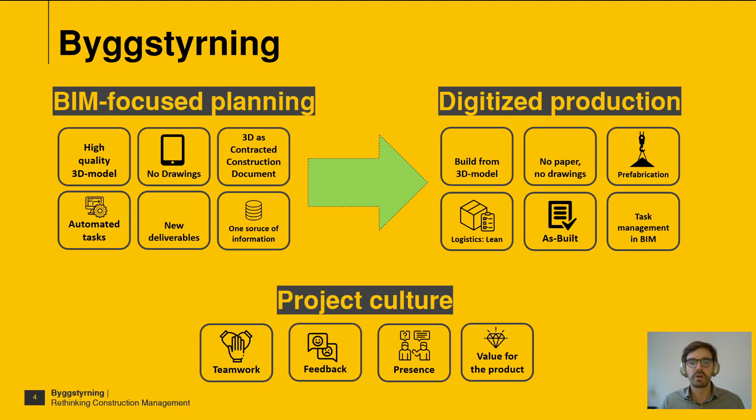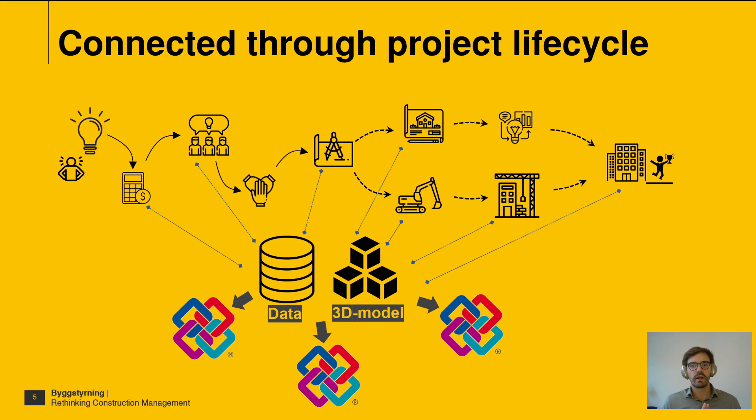We really connect every single phase of a construction life cycle to a common environment, one single source of truth, and do a lot of 3D modeling from the early phases that we enhance over time, to be able to collaborate with all the stakeholders involved using different software. We always use open BIM standards to really be able to collaborate with people in the industry.

About Project Celsius: this project started 3 years ago with the design phase, and it is now finished, actually finished this week, November 1st, on Monday. It is a laboratory and office building in Uppsala, Sweden, in a highly intense innovation cluster area of Sweden, where there's a lot of research on medical laboratories. It's a 12,000 square meter building, together with the biggest building owner in Sweden, Vasakronan.

It's on 6 floors, with a high focus on sustainability buildings right now, which is really good. This building is certified LEED Platinum, the highest standard for that certification system. So it's a really sustainable building with very innovative energy systems and water systems to take care of all the waste within the building itself. It's a really fascinating building from a technical perspective, but from a digitalization and construction phase, it's even more impressive.

We have used 3D models as our contractual construction documents. We used the IFC files as the legal contractual document, and we have not produced any 2D drawings as construction documents. We have to do that sometimes for wiring and some details, and we have produced 2D PDFs, but we have never produced any paper.

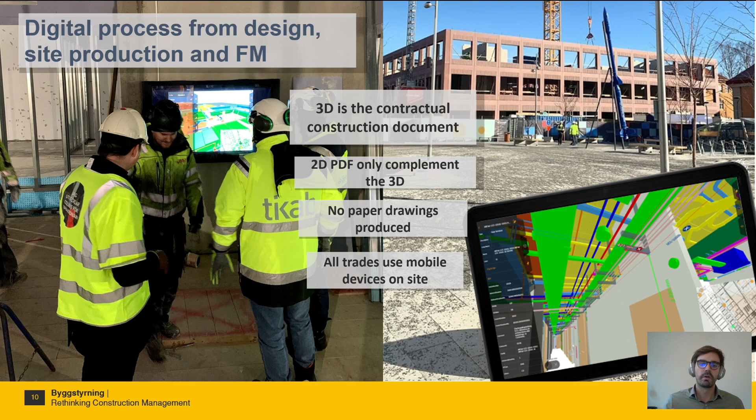Three years ago, when we started the project and started to design it, we had to focus on a completely new way of delivering projects. We were tired of the old way of working, as you see to the left, where everybody works in silos. We wanted to work in a new way.

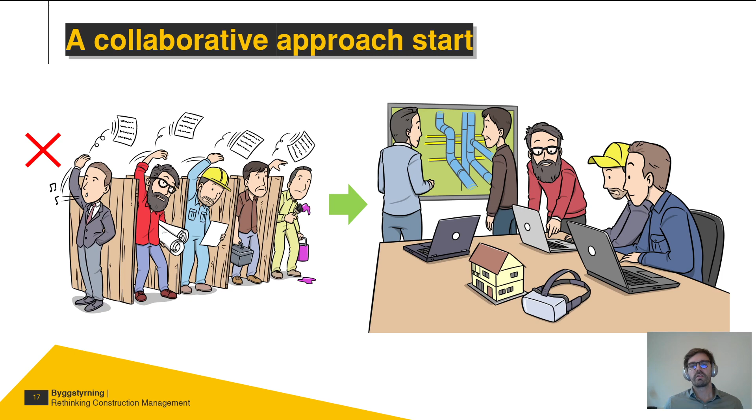Instead we took this approach with the ICE standard, integrated concurrent engineering, and we really sat down with all the stakeholders and involvement to start designing. We also had this kind of collaborative approach later on into the production phase as well.

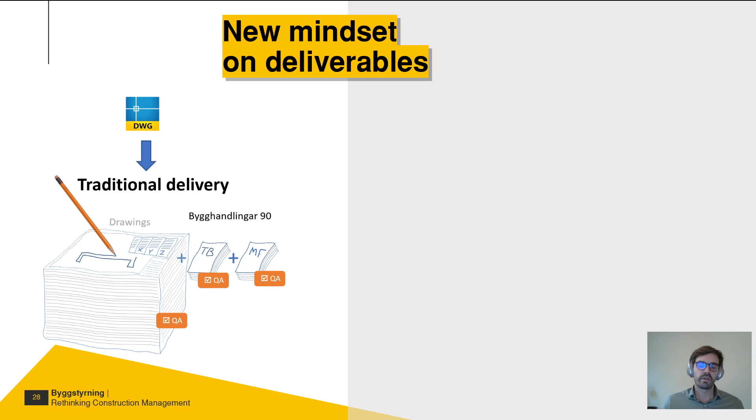But what we were also questioning from the early start of the project was: why do we have to deliver all these classical drawings? Why can't we deliver in a new way? So we started to rethink how we can deliver information.

Instead, we came up with the idea that we can actually deliver information through other file formats, and present the information to other people in the project in the best possible way for them to have the information. If it's somebody that's going to do an estimate on the project, they would very much like to have quantities from the model rather than a drawing.

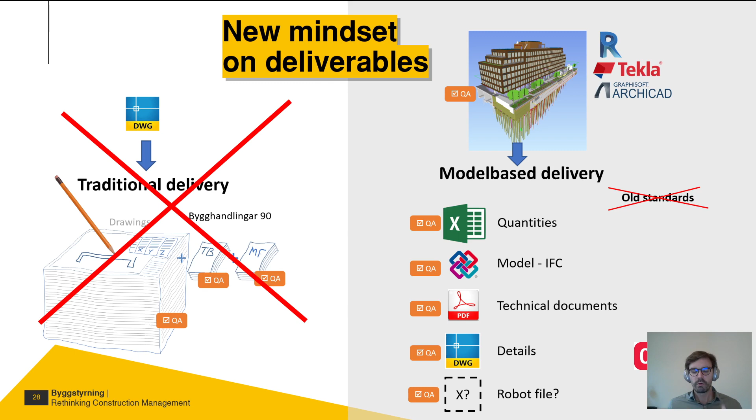So we produce quantities in data tables, and we deliver the IFC model and whatever information was needed from our source files, we could take out. We had a high focus on producing really high-quality source files, where the information is born. If we have really good information there, you can extract that information in a more quality-assured way. So I'm going to skip the design phase because I want to talk about the construction phase.

Before we move into construction phase, I have to mention how we did the procurement in this project, because we used the 3D model as the base for our procurement process as well. So when we wanted contractors to help us build this building, we sent out our 3D model for them to have a look at, to give their estimation and bid back to us.

So we sent out IFC models with just the information that they were going to build, and we also provided them with quantities from the model, because not everyone can take out quantities by themselves from the models. So we did that for them, and we also gave them the classical technical documents in PDF and some details and sections in PDF as well, so you can understand what you're going to build.

And to put everything in context, we also provided them with all the IFC models in the project, in different viewers, so everybody could use whatever software they wanted. And that's really key here, is to enable everybody in the industry to be part of the project by using open IFC files and open BIM models.

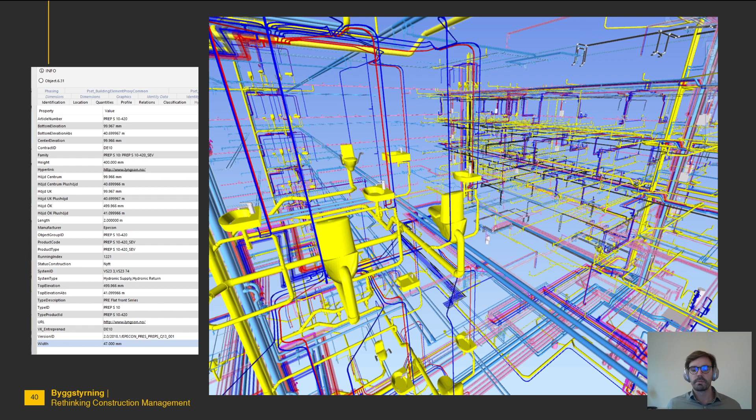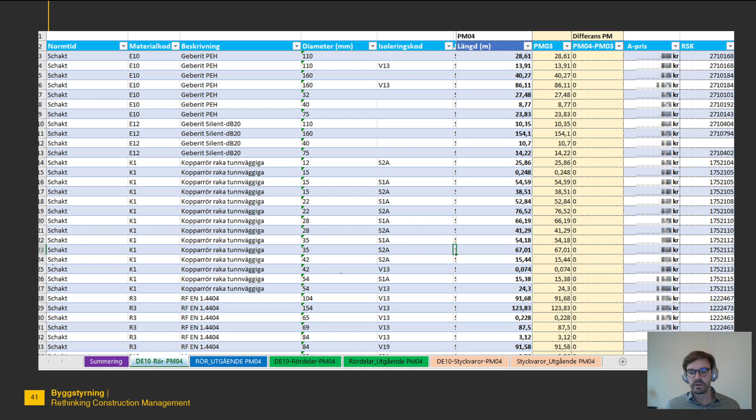You can also view the IFC file through a table, like an Excel table, so you can extract all the information in the IFC file and just put it in a data table like this with the quantities. So we did all the quantities for the bidders as well.

So we have divided the building among many different contractors that are going to help us build that specific building element. For example, the window, we had a bidding for that and a contractor for that, and the ceiling, we had a bidding for that and a contractor for that.

So we split it up into different IFC files that you could combine into one big IFC file, but it was a different IFC file for each contractor, so it was really clear what was in their contract to build. So if we had the contractor for the window, it only contained the windows that they were going to install and nothing else. So it was really clear on the scope of their contract, and exactly what kind of products they were going to install. So it was super clear and super easy for them to take part of the information.

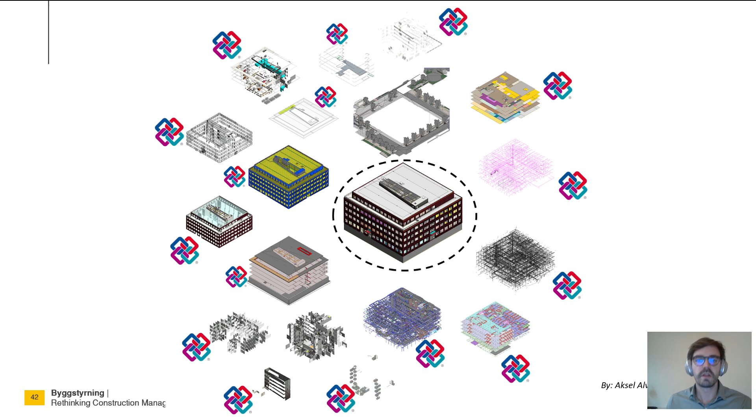And we could immediately see what we were going to buy. So when we have done all the bidding and we have a bunch of contractors that are going to help us build this, we also want them to construct and build from the 3D model.

So this is our a bit messy workflow on how we have achieved that. During the design phase, we have used a bunch of software, but mainly Revit, which we have used BIM 360 to link together in the cloud. But we have also used Tekla for superstructure and some ArchiCAD for interior design.

And to work in the design, we have been able to collaborate by exporting IFC files to each other. And to eliminate human errors in this process, we have set up nightly routines on servers that automatically export IFC files during the night. So we always have up-to-date IFC files from our BIM authoring tools. It's a completely automated process.

And then we use SimpleBIM to clean the IFC file and color them in a proper way and do some data management in SimpleBIM. And then we can take them to Solibri for doing quantity takeoffs.

But we also save them up to this field application that we are using, which is StreamBIM. So we put all the IFC files there, and you can view the 3D in the field, and you can put other documentation here. We put our PDF for our weekly collaborating meetings in a whiteboard app. We put a link to photos from each room.

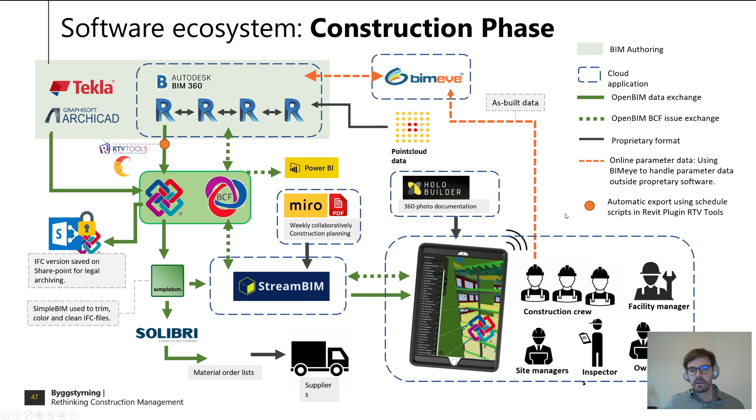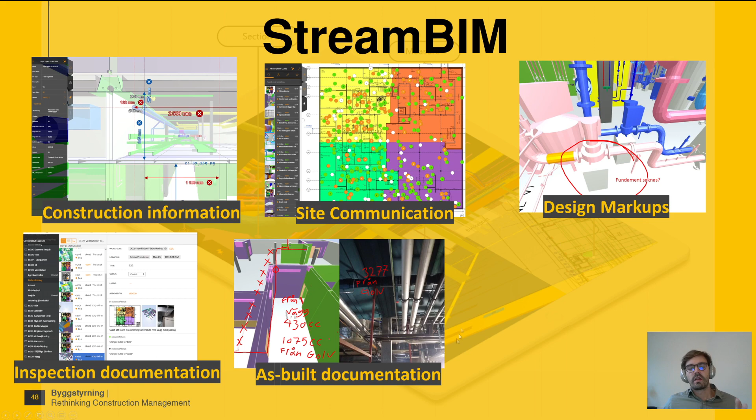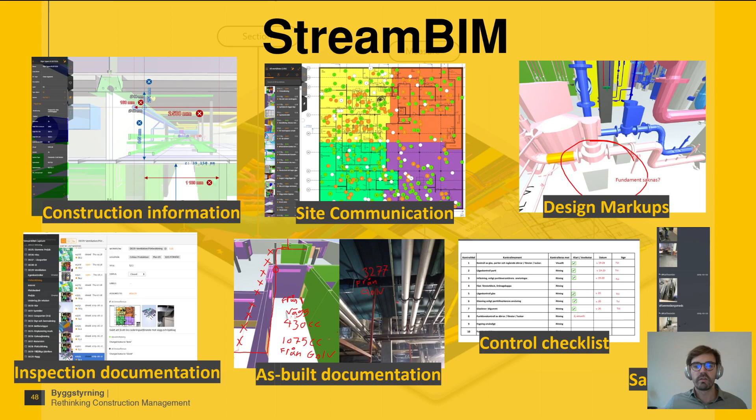And so we use StreamBIM for everything we do in the field, from construction information to communication to inspection, and using it for as-built documentation, so we can update our models. We do control checklists in all kinds of ways, so everybody can follow up. And we also do safety issues. You don't see it because I'm behind that blob here, but we do all the safety issues around, so the site is clean and nice and safe for everybody to work in. We do all that kind of management within this application.

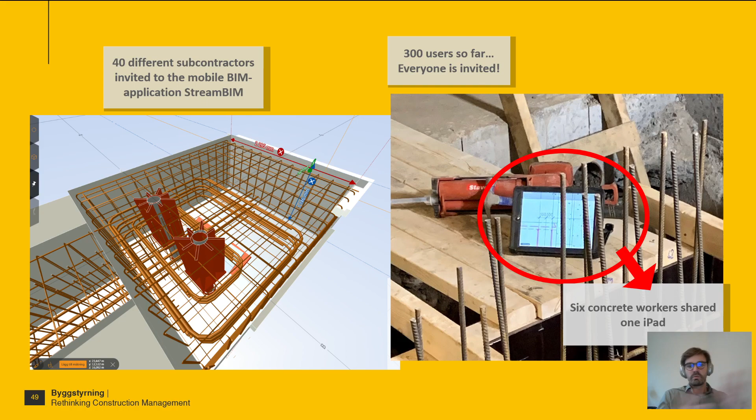So everybody on site is invited and using StreamBIM for taking part in the project. So they have to have a login to this platform. So we have had over 300 users so far during the project lifecycle. But not everybody's running around with an iPad or a mobile phone. For example, the concrete team, six people shared one iPad, so it's not that tech-savvy a site. You could still use your own phone as well.

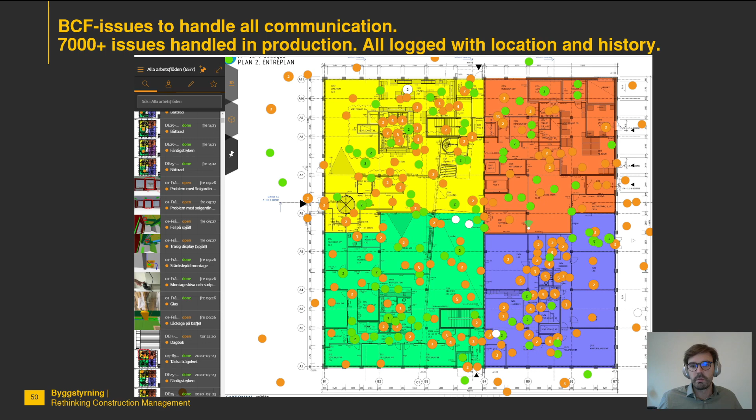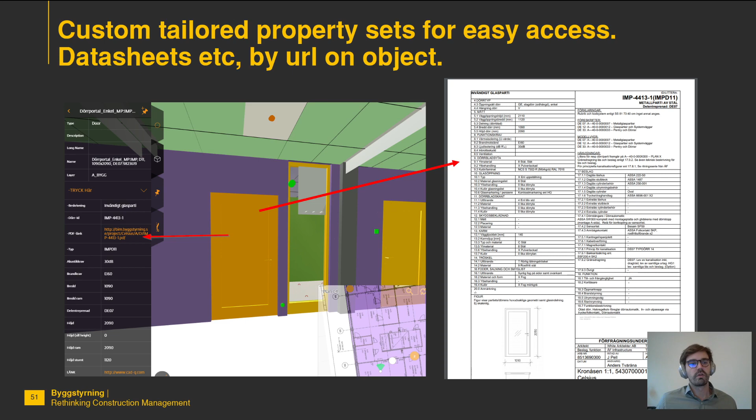So this is just an example of all the issues we are handling on site. I think we are almost up to 8,000 issues we've been handling during the construction phase. We also link a lot of information to the objects itself by using property sets within the IFC file, and put on smart properties and really display the properties in a good way so everybody can understand, because not all properties in the objects are relevant during the production, so we have to highlight them with the different property sets and link information.

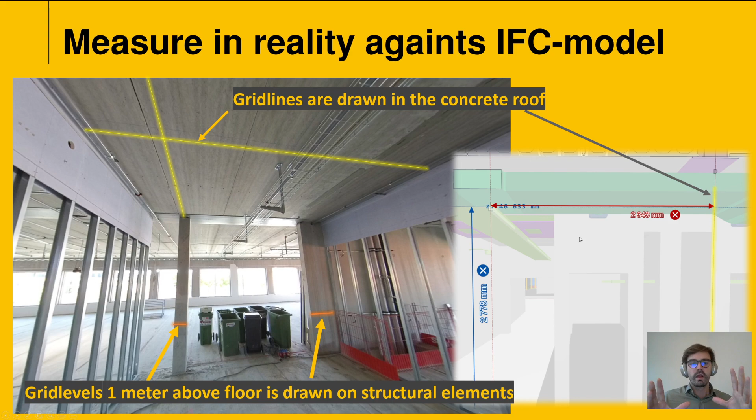And to be able to take measurements from the reality and within the IFC file, you have to have some kind of reference for both of them. So we use grid lines that we have drawn physically in the roof and also on columns and walls. So we have grid lines there, and you can have laser measurement tools to take measurements from these lines in reality, and we have the same lines within the IFC models, so you can take measurements from the lines in the IFC model to the lines in reality, and in that way make sure that you put your things in the correct place.

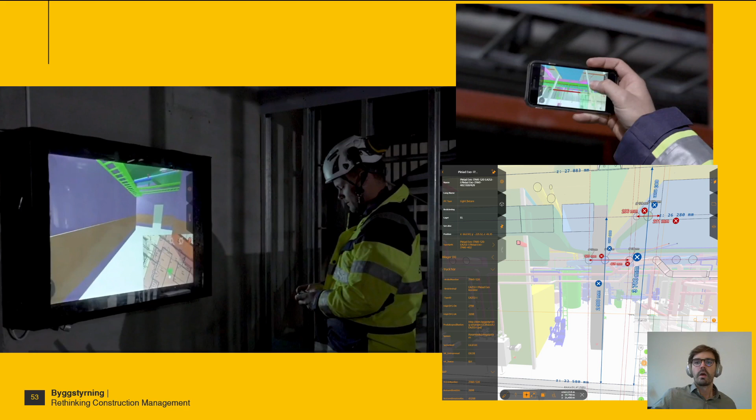So this is just some pictures from the site where we have TV screens you can look at, but most people use their phones and tablets to access the information. So, as I said, we have used the IFC model as our contract document. So that's our legal contract document. We have not used any drawings. So, for example, all the windows here are in a single model, and that's our contract with them. And we put that one up here into the field application. So this has worked out really good.

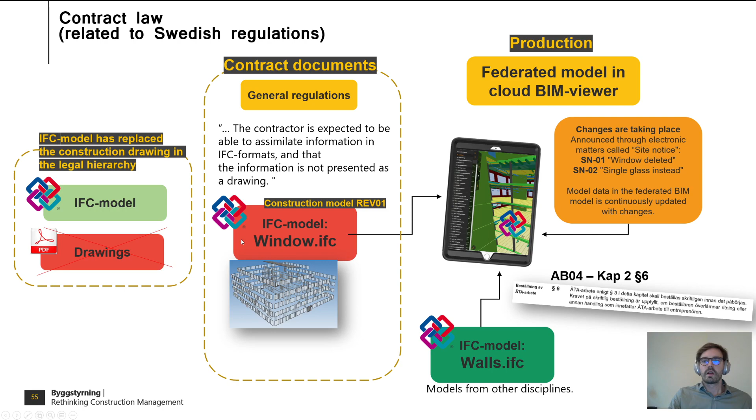Because when we do these construction workers feedback surveys, which we hire a third-party company for that does a lot of surveys on construction projects around Sweden, together with the building owner, we want to make sure that we are on the right track in our big projects. And when we did surveys a couple of times during the project, we got a really high score in this PQI, Project Quality Index, an index for the construction industry, and it was the top project in Sweden, and the testimonials from the site workers speak for themselves.

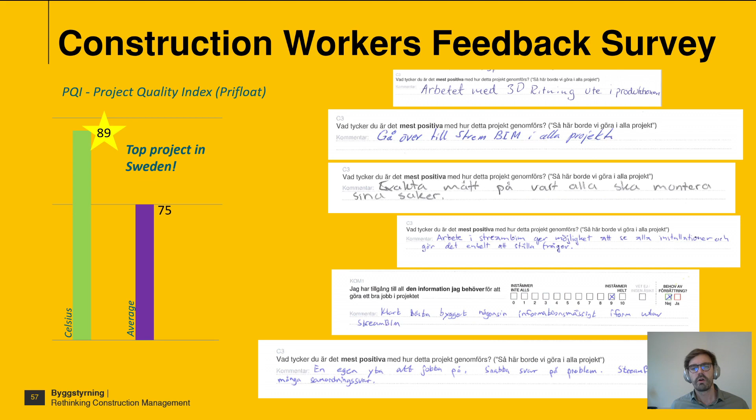Everybody talks about how good it is to have all the information accessible. Now I can do my work properly, now I can take the right measurements, everything with the digital is so good. And these are comments from the actual site workers that are doing the work on site, so they are pretty picky, they really want things to work out, and they really say that it works out.

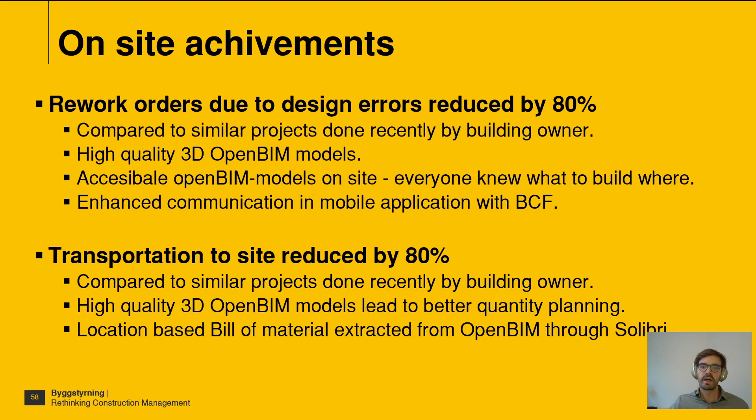And we have also seen some results on rework orders during this project compared to previous projects that we have been involved with, and also compared to others by the building owner. We have done some calculation, and the rework that comes from the design is down almost 80%. And for transportation to the site, we have also been able to reduce by 80% by working a lot with the logistics and using the BIM model as a reference to do quantity takeoffs for specific locations in the building, so you can do really smart logistics planning with the help of the IFC model.

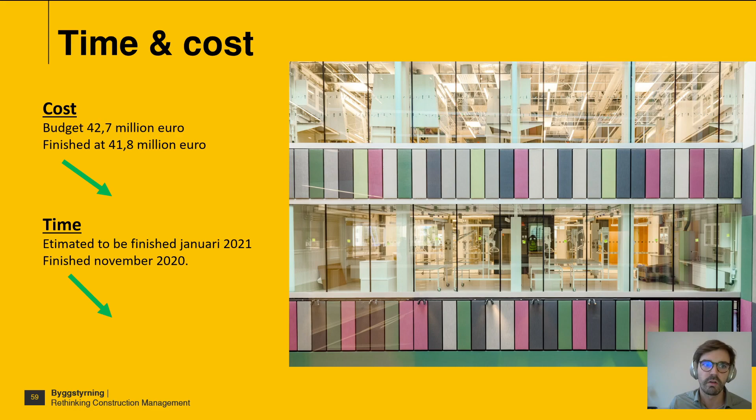So the project has gone really well on cost and time. The budget was set to 42.7 million euro, but we came in below that. And also the time, it was originally estimated to be finished in January, but now we are finished in November. So it's really a success on time and cost as well. And we have had a lot of companies involved in this journey. Vasakronan and we at Byggstyrning are really happy to have been working with all of them, and we thank them for all the collaboration that we have done.

And in conclusion, Celsius is a project where great commitment, a good collaborative climate, and innovative use of digital tools have created a project with high added value for the customer, without workplace accidents. It's under budget and finished earlier. And this was only possible with the new processes enabled by digital tools developed on the OpenBIM standards IFC and BCF.